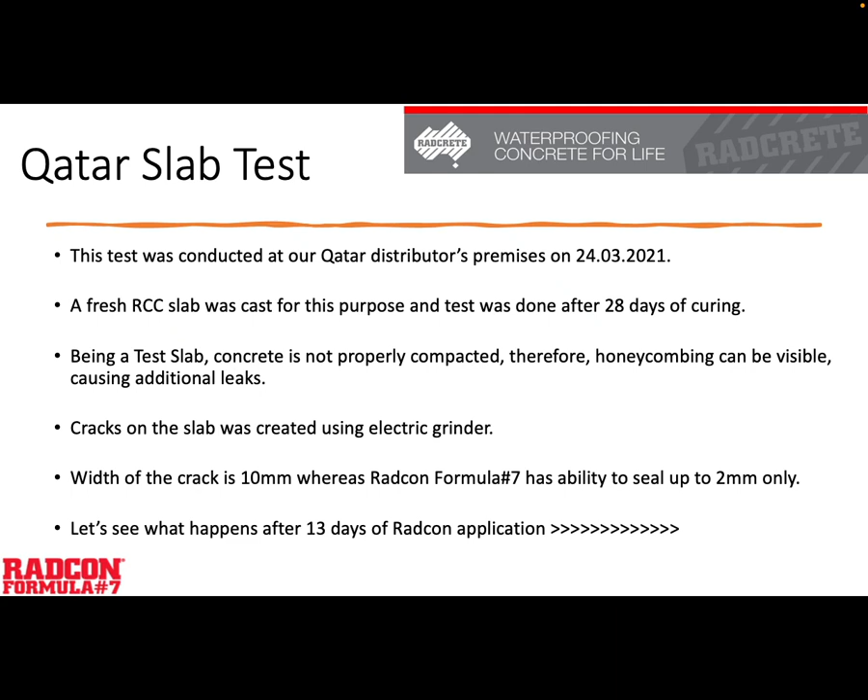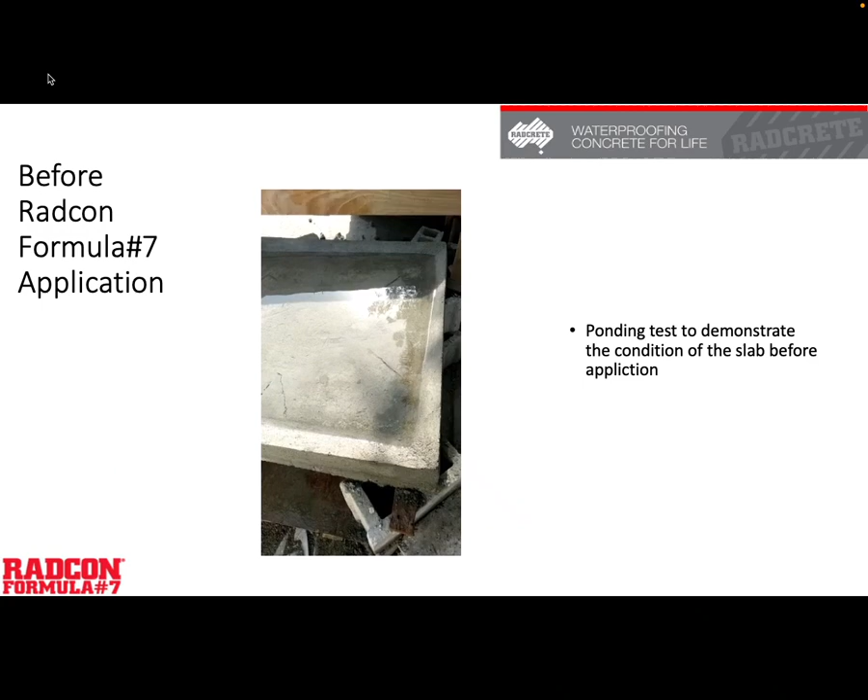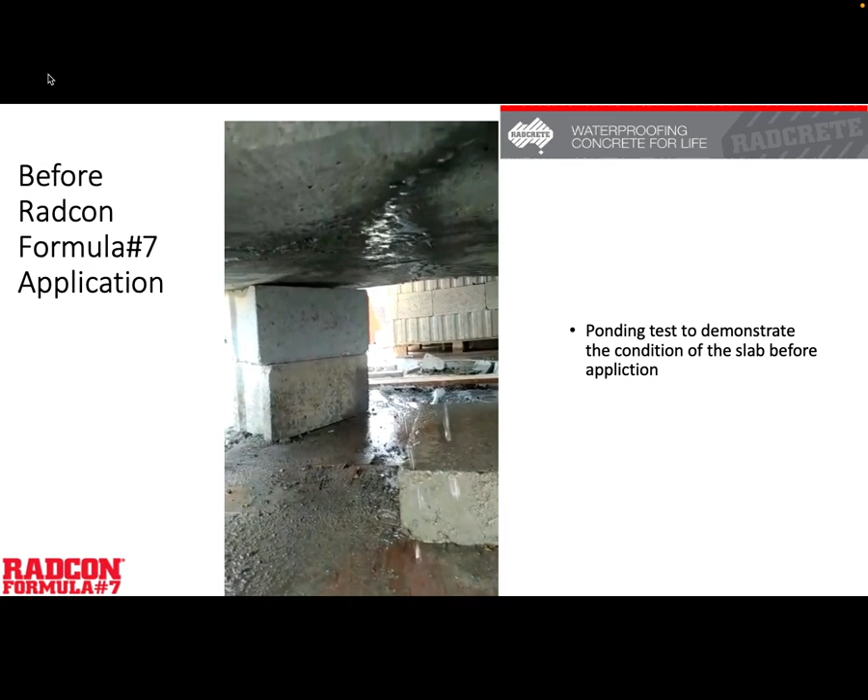In addition, to create a very extreme challenge, larger cracks were also created with a grinder to see what Radcon could do. A ponding test was conducted on the slab to demonstrate the extent of leakage prevalent in the slab, many of the cracks actually right through the depth of the concrete. As can clearly be seen, water pours through the slab like a shower.

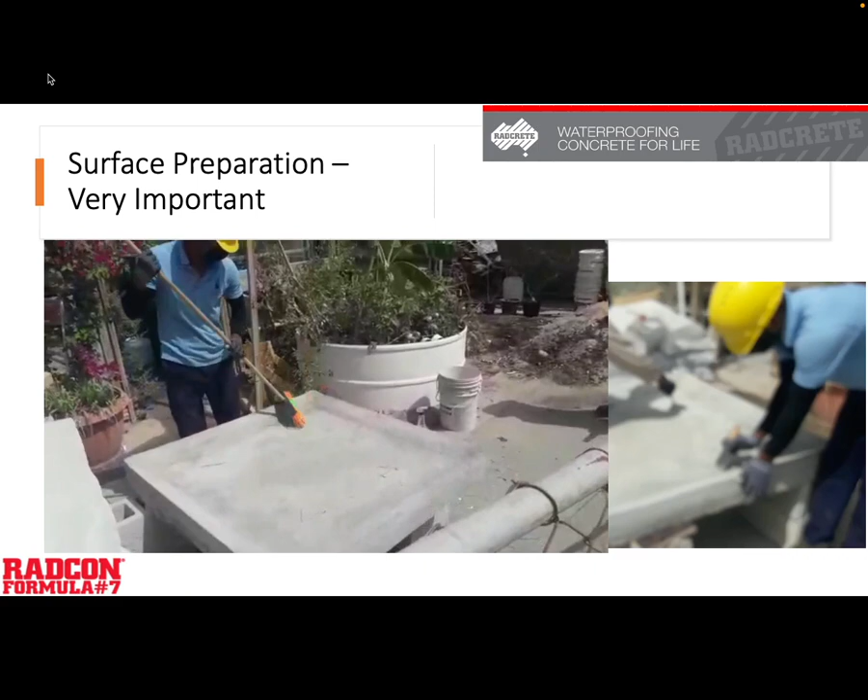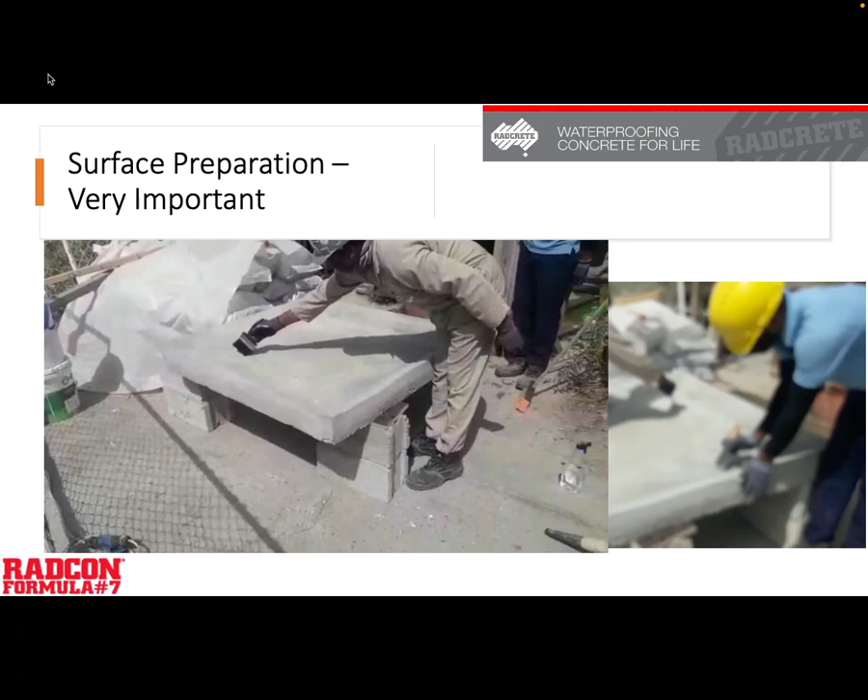In the application of the Radcon Formula 7, preparation of the slab surface is critical, and the applicator was tasked with following the recommended processes in full. That starts with the removal of dust, laitance, and anything that is on the surface that could prevent Radcon from penetrating beneath the slab surface, with particular care taken to remove dust in the larger cracks.

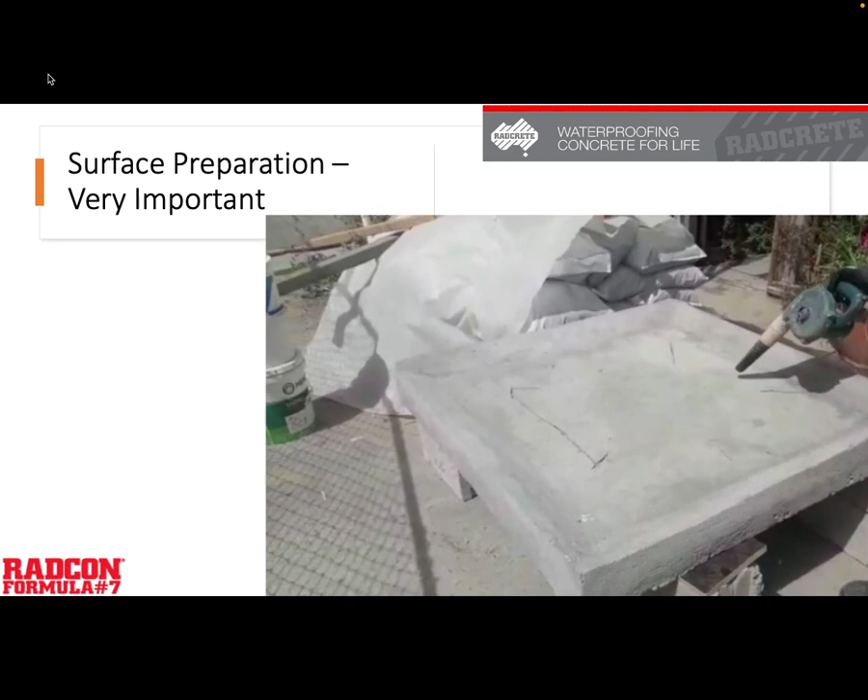Loose material is removed in and around the larger cracks, and typically a blower or a vacuum will be used as a finishing touch to ensure a completely dust-free and open texture concrete surface ready for the Radcon application. Because of the extreme cracking induced in the slab, the bottom surface is taped to prevent the Radcon itself moving right through and being lost.

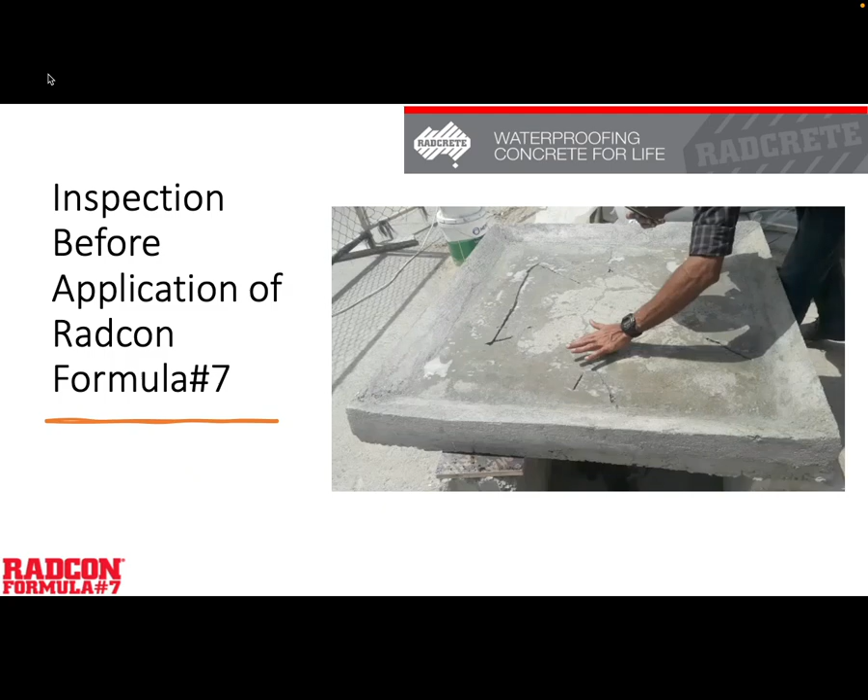A final inspection is carried out by a supervisor to make sure that the surface is well prepared, completely dry, and absolutely ready to take the Radcon application. The application begins by treating the large visible cracks directly first, where a handheld spray is used to introduce Radcon right into the cracks. Typically, for visible cracks, Radcon will be applied at the rate of 1 litre per 3 lineal meters of cracking into the cracks themselves.

Once the cracks have been addressed, Radcon is sprayed with a low-pressure spray evenly across the whole surface of the slab at the rate of 1 litre per 5 square meters. The Radcon will be pulled into the surface of the slab through capillary action. Once completed, after the slab becomes surface dry again, it will have a slightly tacky feel. This is when a first light watering is applied to help the Radcon penetrate deeper into the slab.

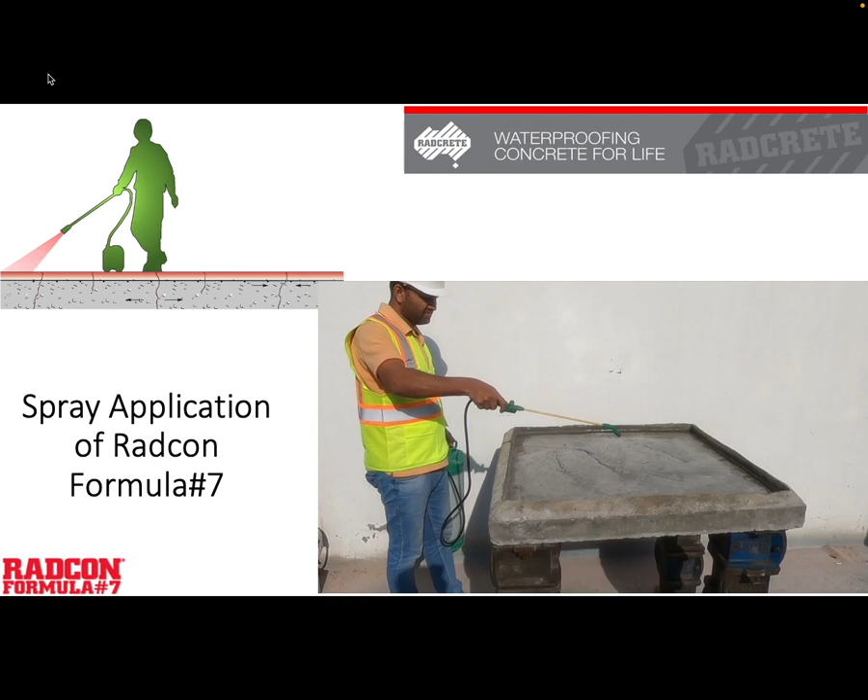2 subsequent liberal waterings are applied the following day and the day after to keep driving the Radcon into the concrete matrix and to ensure that there is plenty of moisture to react with the free calcium in all the microcracks and capillaries. On the 4th day, the slab is ponded to evaluate the extent to which the slab has been sealed as a result of the gel that forms through the reaction of Radcon Formula 7 with the free calcium and the moisture that's available deep in the slab.

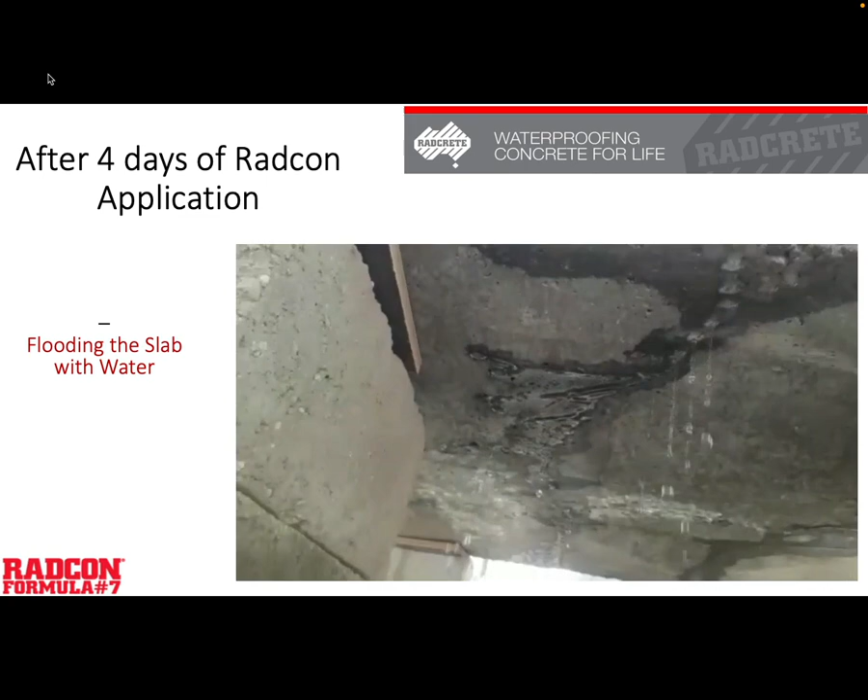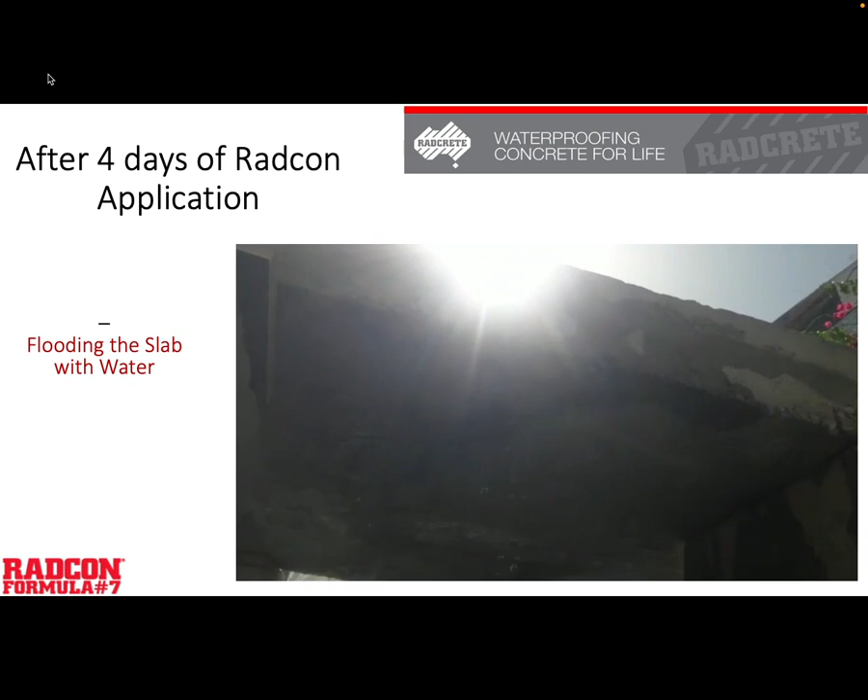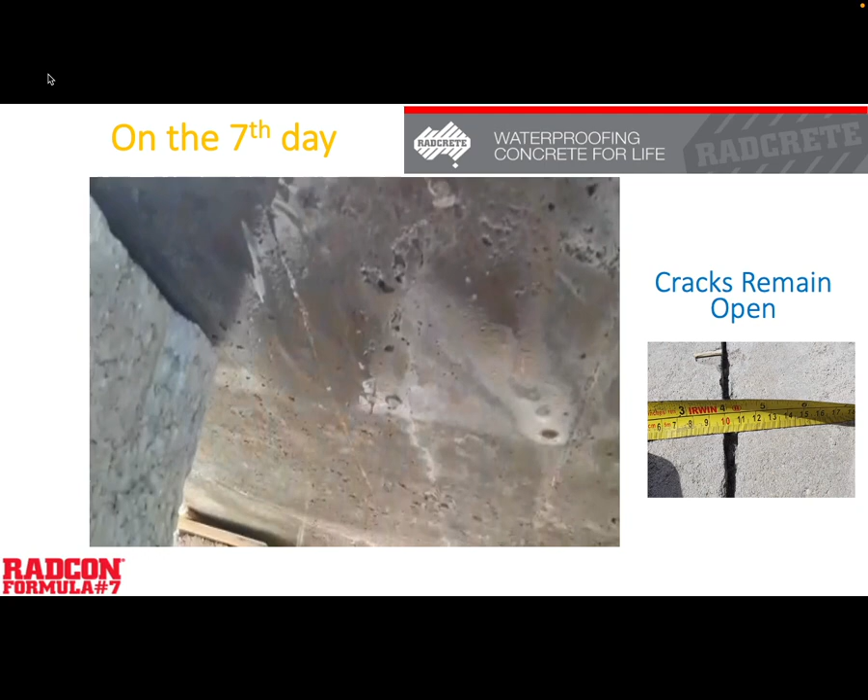At this stage, there is still plenty of work to be done by the Radcon, as the slab shows it's still extensively leaking. Have we gone too far with the demonstration, and will the Radcon gel grow and bridge the cracks? The process for the gel to form and grow and swell into the available spaces does take time. By day 7, the Radcon has clearly slowed down the amount of water, but there remains a slow and steady leakage, as the larger cracks clearly have not yet closed.

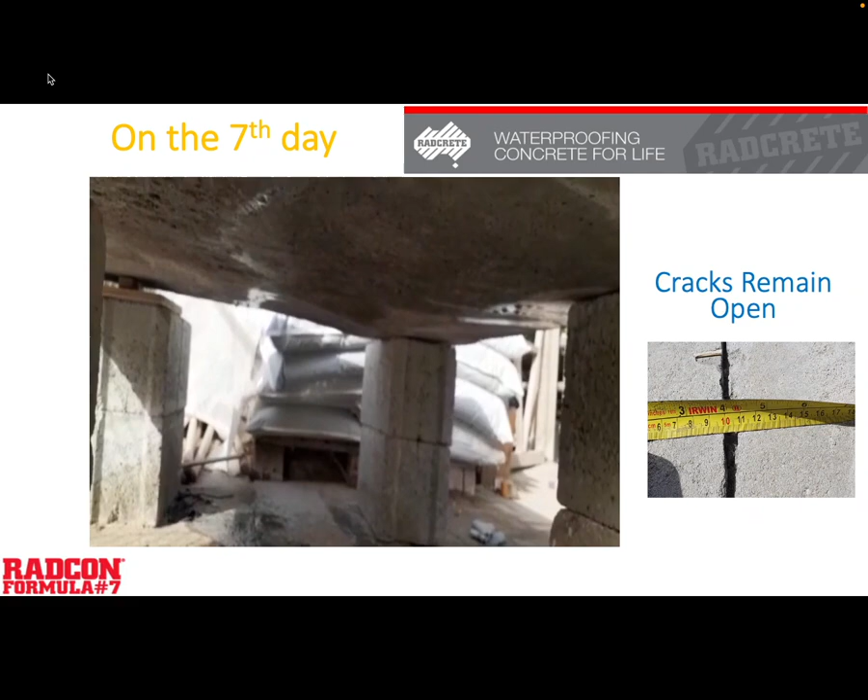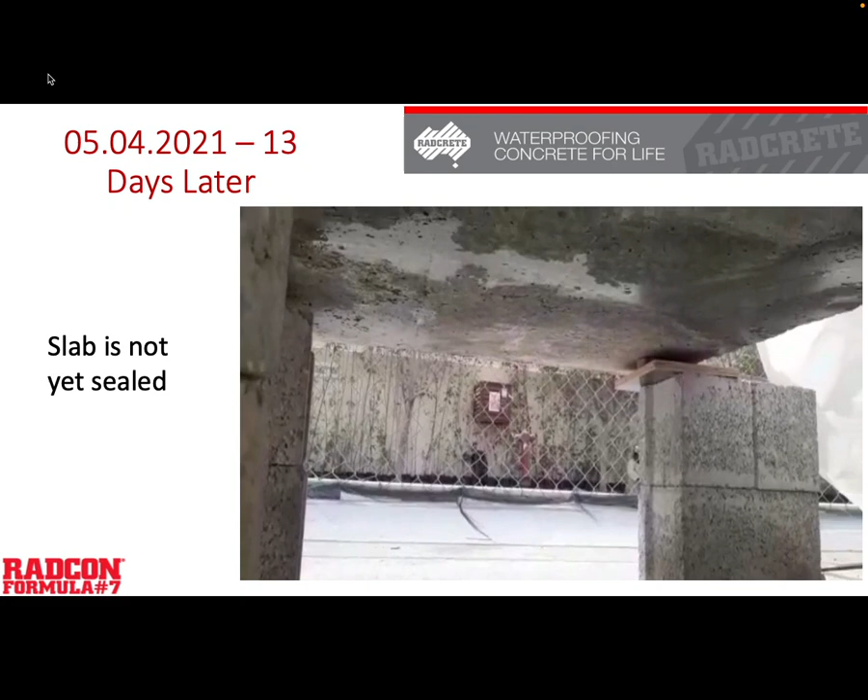By day 13, there remain a couple of very isolated, stubborn areas where a slow and steady drip is still evident. A call with the Radcrete team in Australia assures the team in Qatar that the Radcon will still be working hard, and with a few more days, it may well be able to seal the remaining cracks.

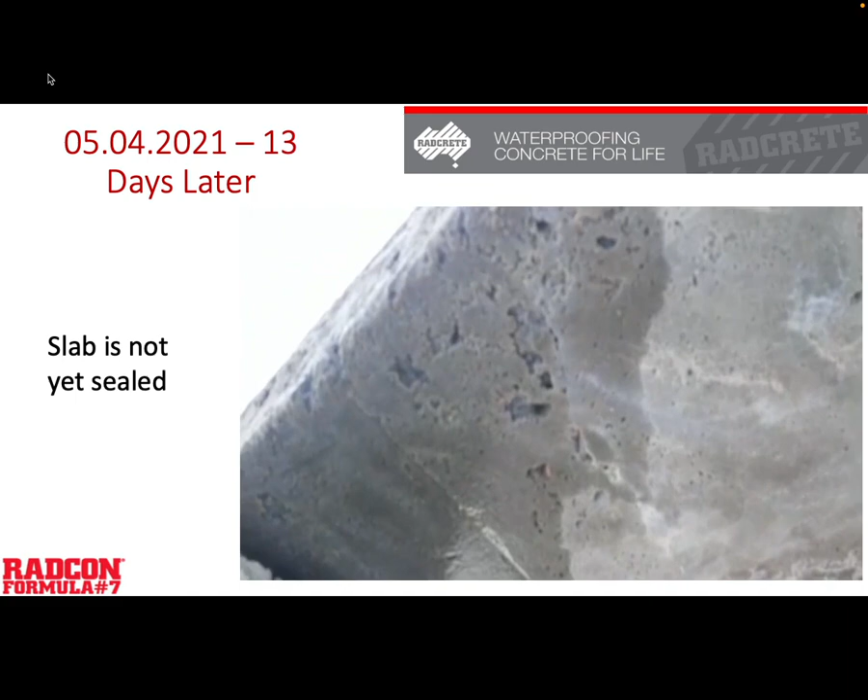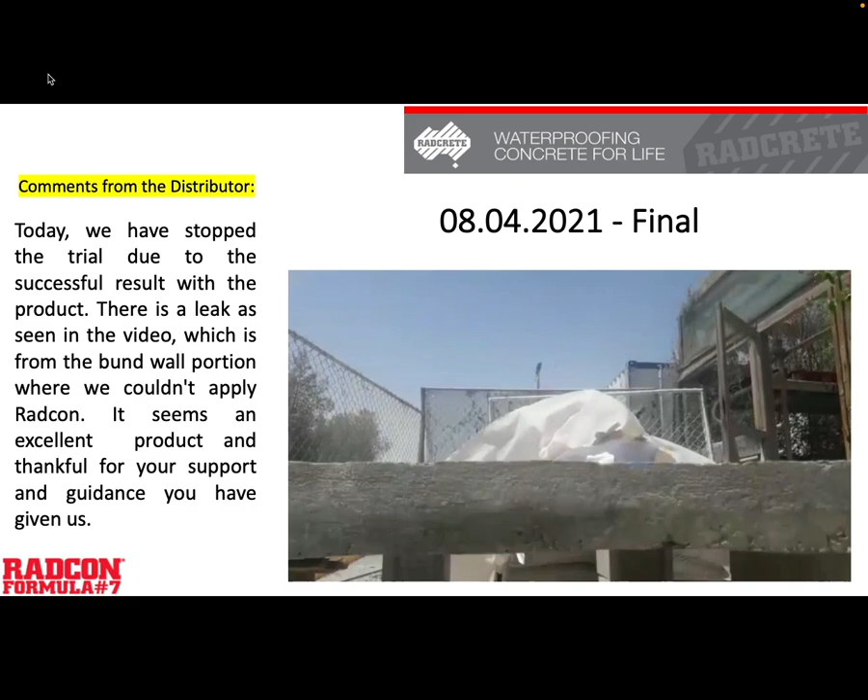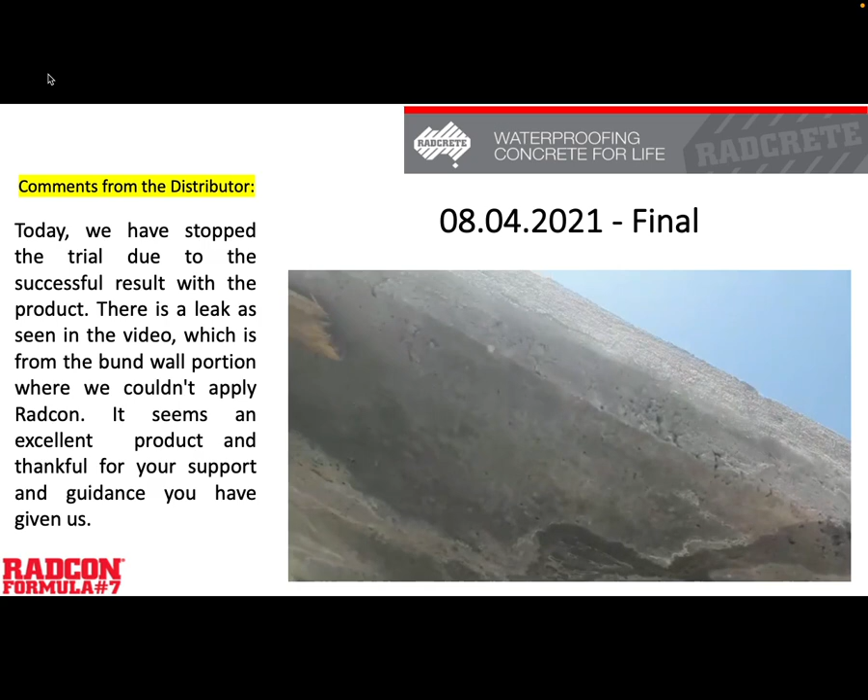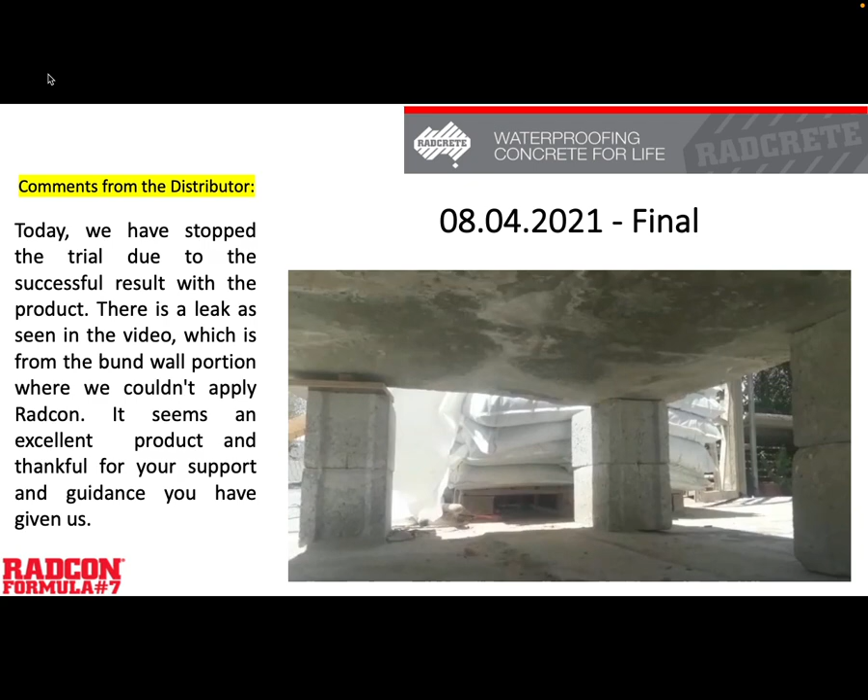On day 16, the local Qatar team declare the trial over. A close look at the underside of the slab shows how it's drying out, with only one area where there remains a very slow drip. This small leak is revealed to originate from under the bund wall that was created at the beginning of the test, where the surface could not be treated with the Radcon. The team declare the demonstration an absolute success, and they are very confident in promoting Radcon as a solution to the Qatar market.